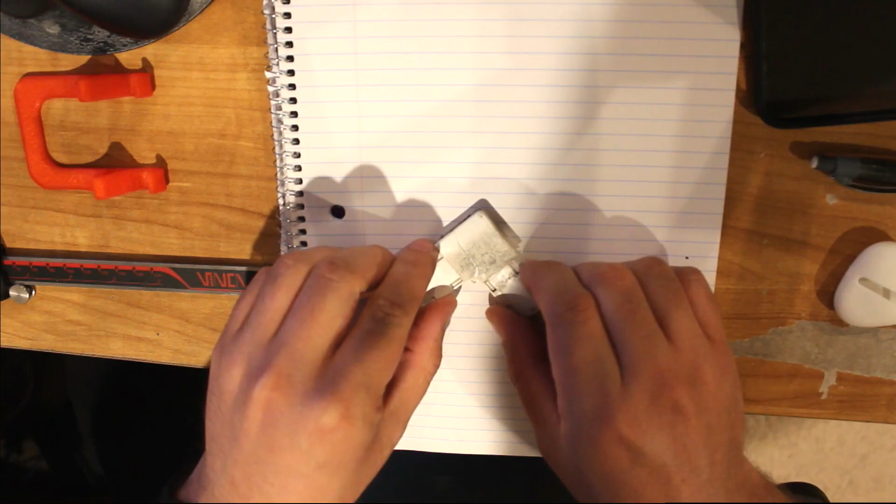Okay, so to start with this, the first thing we're going to do is take our pieces and start on good old-fashioned paper. When we put it together and think about how we're going to make this, we have to look first at what tools we have to work with. When you design in CAD, you have extrudes, chamfers, and other extrude cuts, and this is actually a pretty simple model from the looks of it.

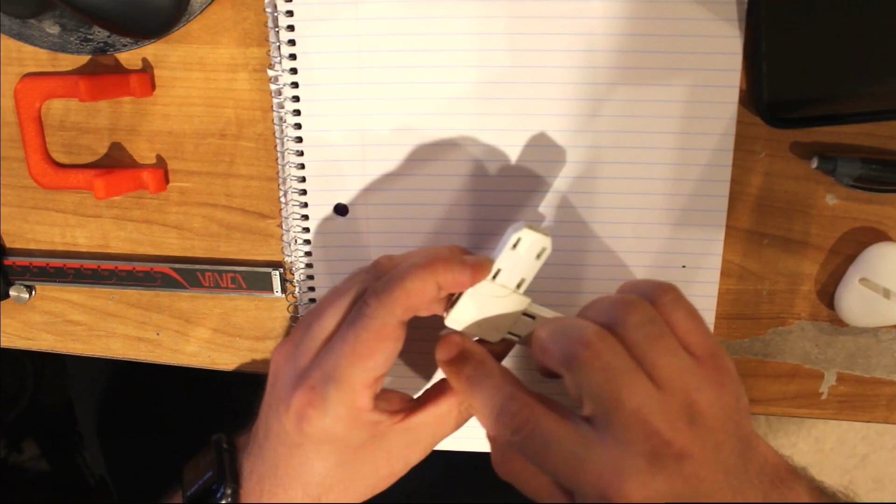So the first thing we're going to do is measure this square here. I'll think of this as a top view. You look at the top view, you have that square, and we're going to take the piece that has the most purchase on it. We're going to measure this at 28.5 millimeters, so this is going to be a 28.5 millimeter square.

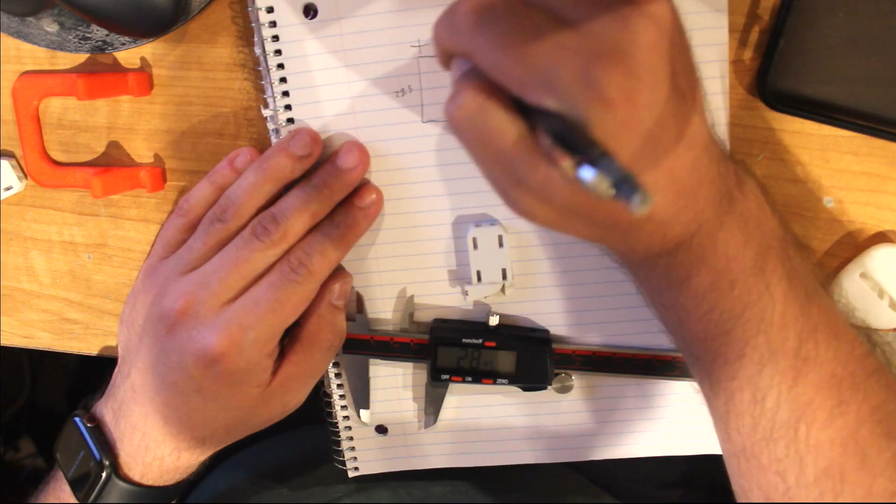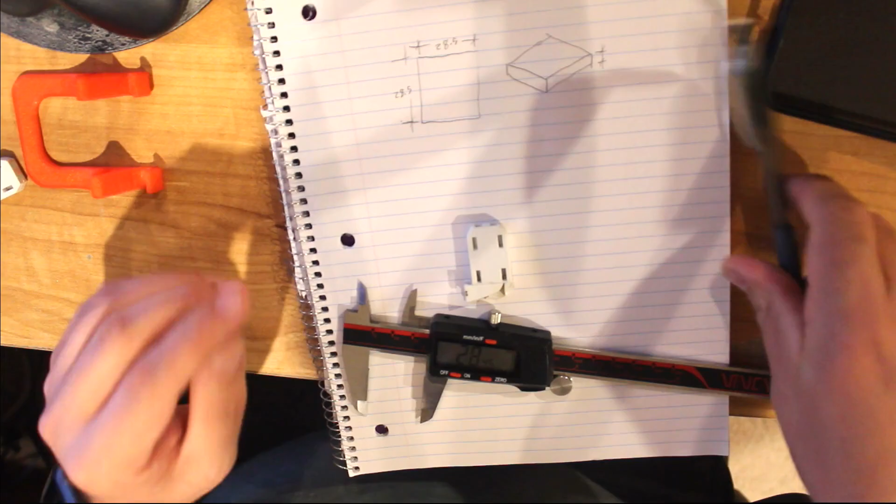And then for depth, we're going to look at how deep we want our square to be. We'll go ahead and quickly draw this ISO view to give us our depth, just adding these features real quick so we know where we're at. So for our depth, we'll take it and measure across the top at about 7.8 millimeters.

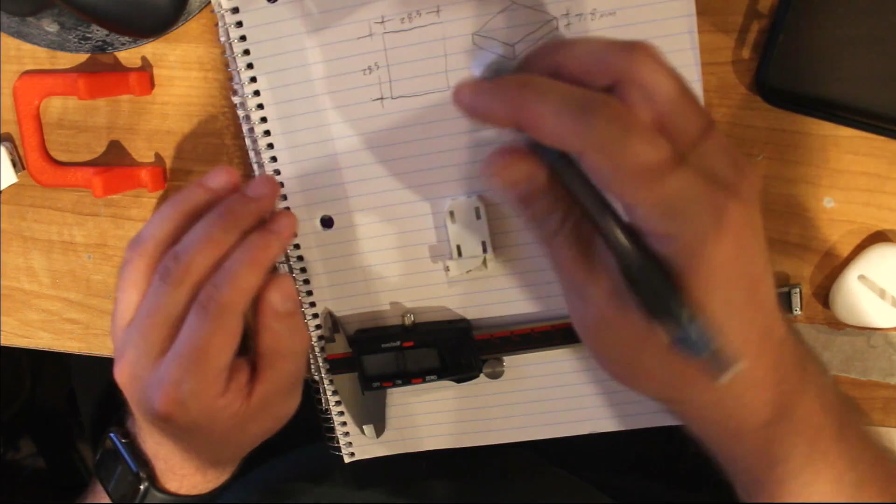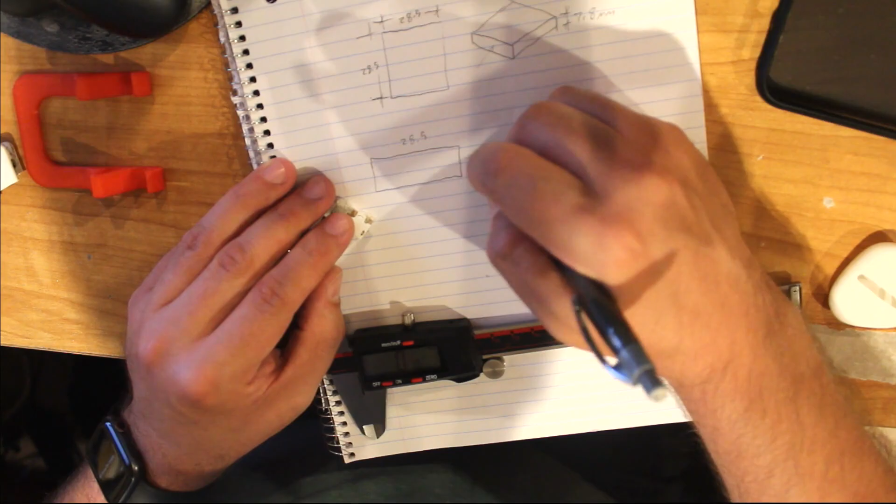Okay, and now for the tangs, these little tang parts, we're going to have to draw that on this face right here. So I'm going to draw a square that is that face. We know the top is 28.5, the side is 7.8, and now we have the little tang in there, like so.

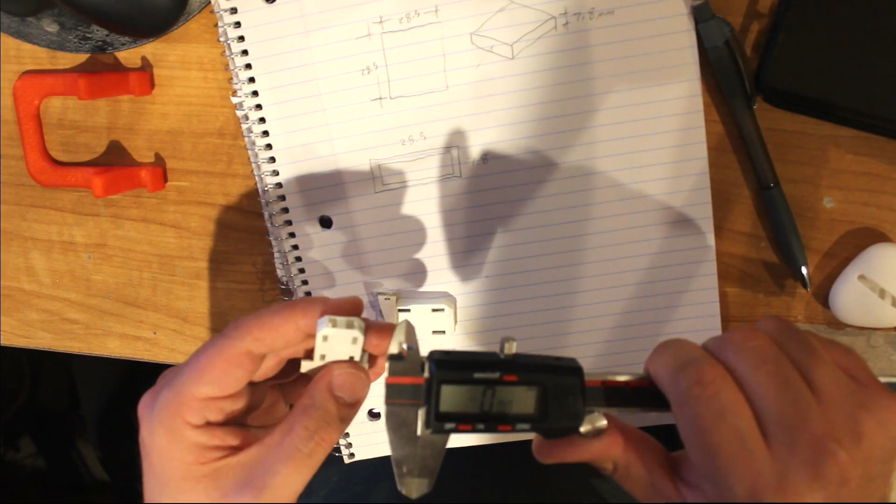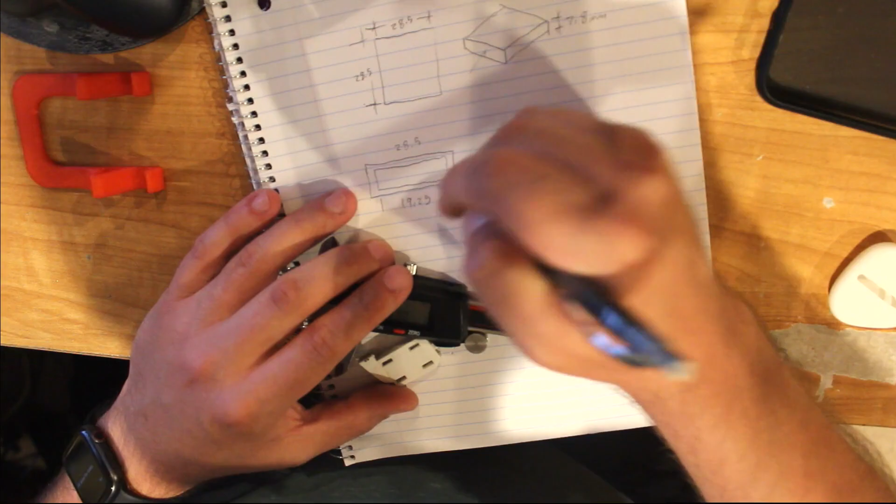So we'll measure its width: 19.3, measure the other one just in case, 19.24, 19.17, 19.25. So we'll do 19.25, I think. Its dimension right here is 19.25, and its depth, similar to how we did the body itself, measures 6.84, 6.8, 6.89, 6.86. We'll do 6.8.

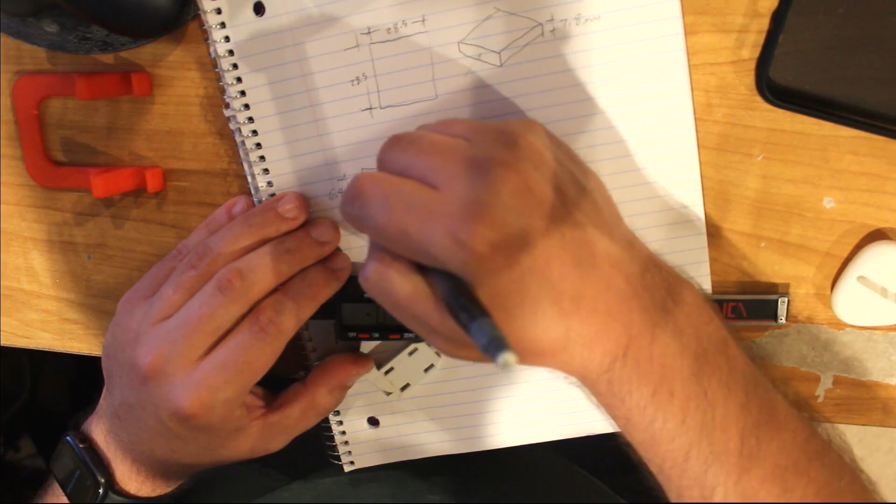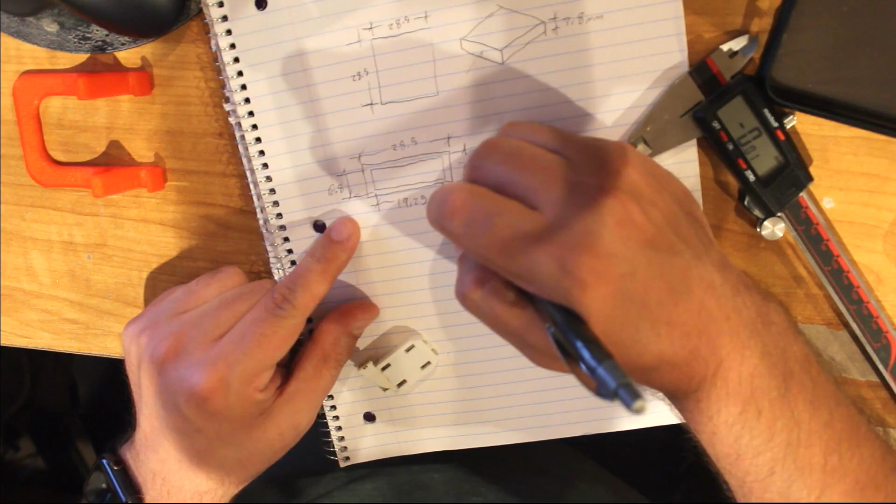Okay, so we have 6.8 there. I'll draw those out so we remember it - 19.25 there, and then this dimension to the end right here, we'll need that as well.

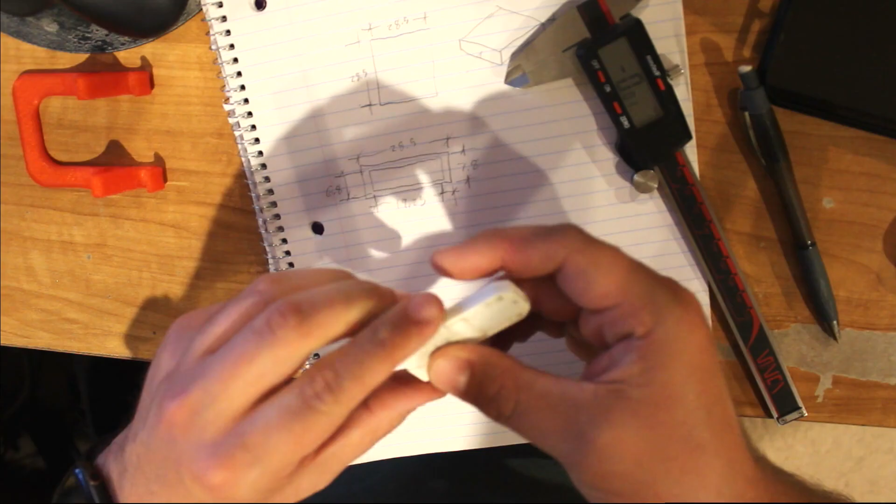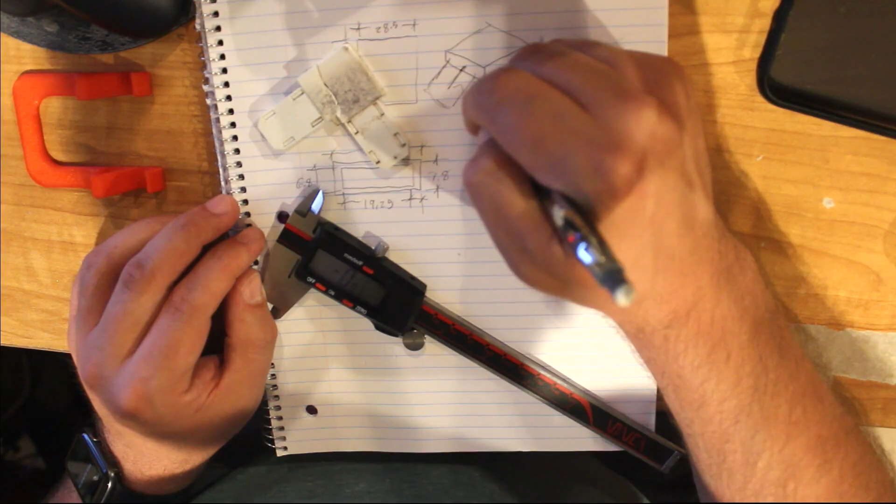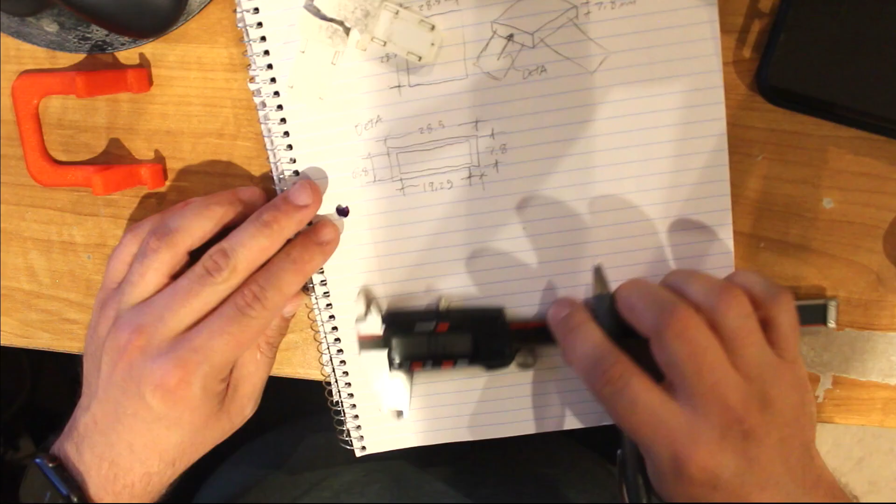So when we think about how this is drawn, these actually aren't symmetric - they're not on the center line, they're actually offset slightly. So when we look at it like this, maybe we'll sketch these in just so we understand our point of reference. This here, we'll call this detail A. So this is, looking at that like that, detail A. We'll know there's a little cutout right here as well that we'll need to contend with.

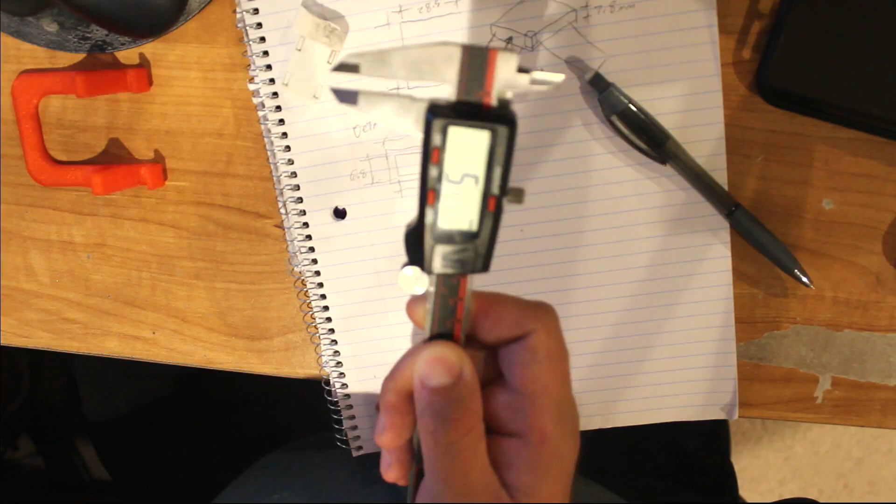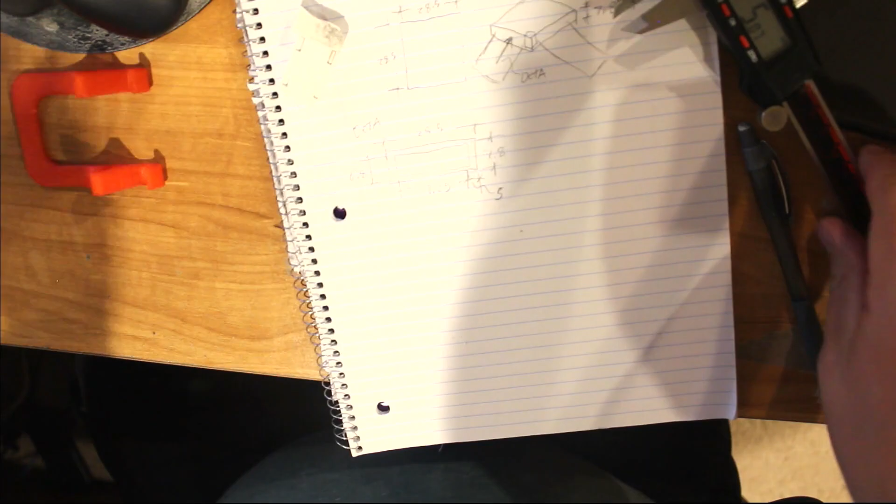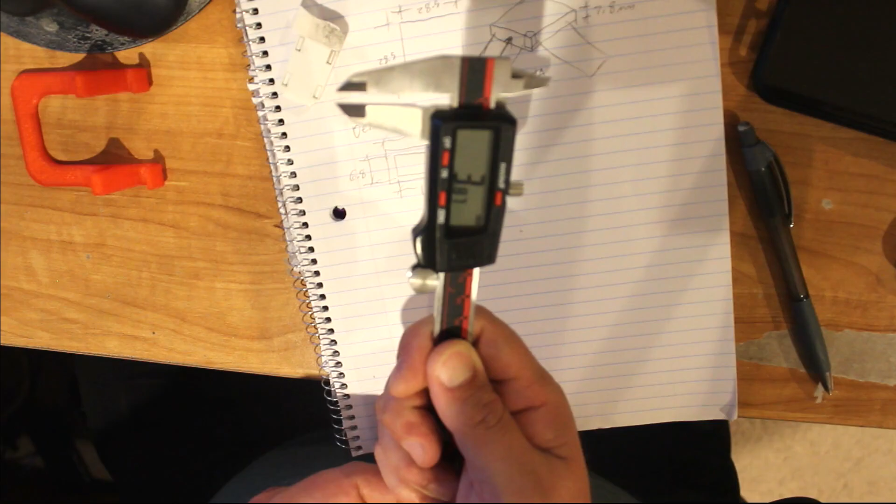So let's take a look at that cutout. How far from the edge are we? We measure it like that - about 5 millimeters, I'm going to call it. So this dimension right here is 5. And the dimension from the other side is about 3.9. So this dimension here is about 3.9 - let's just go with 4.

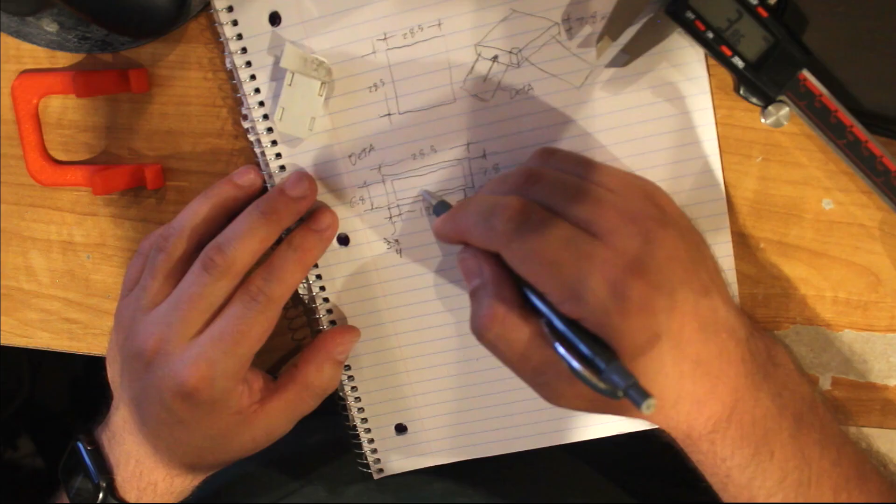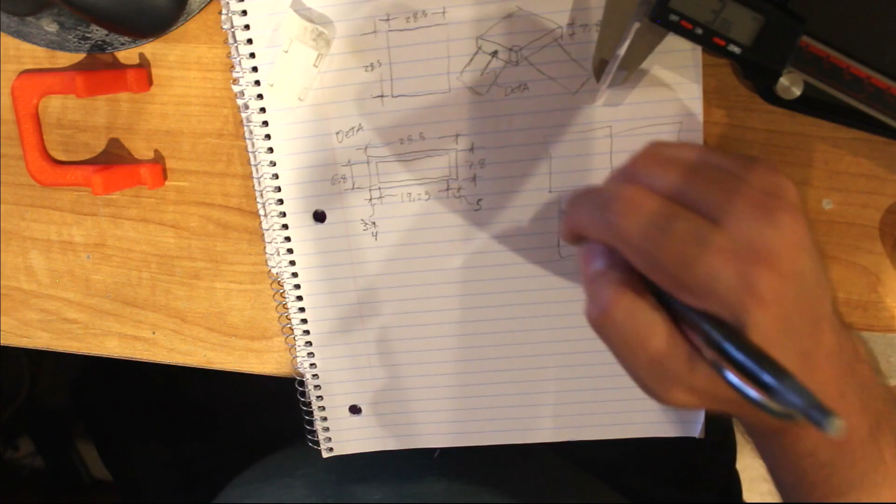Okay, so that's that. Now let's look at the length of this tang. We'll draw it from the top again, and we have this tang here like this, and this tang here like this. So this distance from here to here is going to be about 29, I'd call it. There's a couple different ways you can measure things, so you can do it like that - about 28. So we're going to call that 28 millimeters. And then what else do we need to measure? These chamfers.

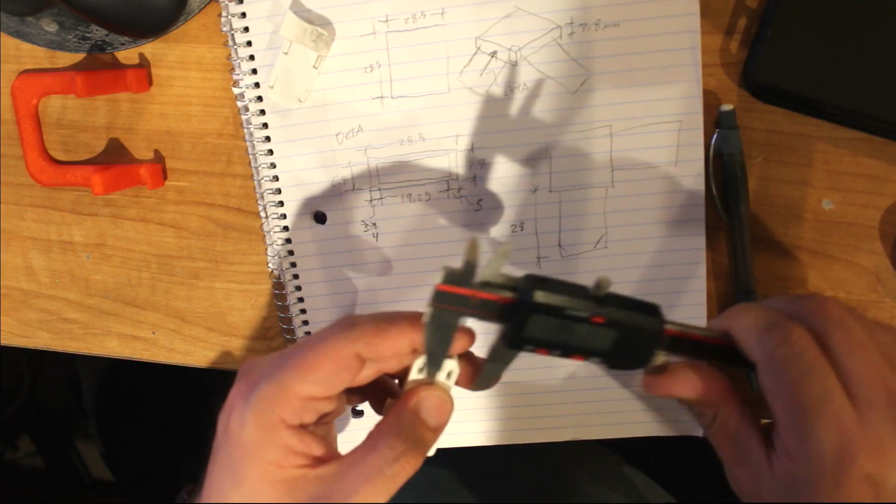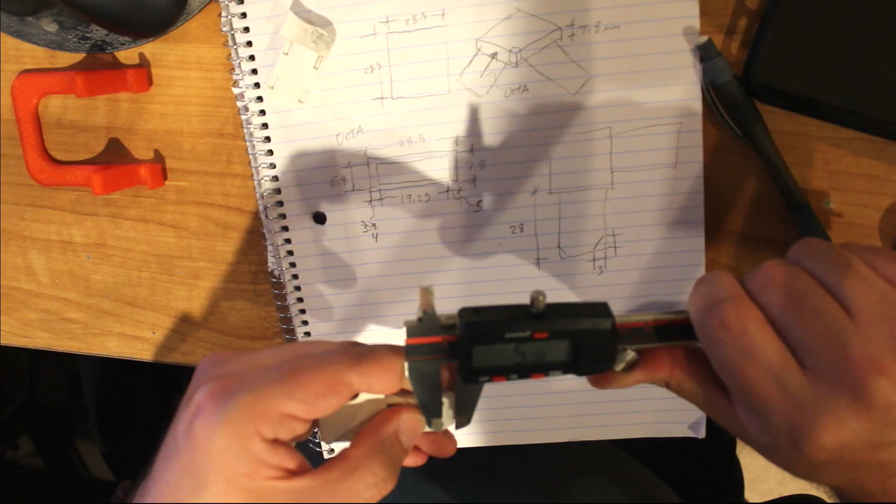So these chamfers actually aren't 45 degrees, so we'll do a two-dimensional chamfer. Measure that at roughly 3. And then right here we'll do at roughly 5. So this is roughly 5. Okay.

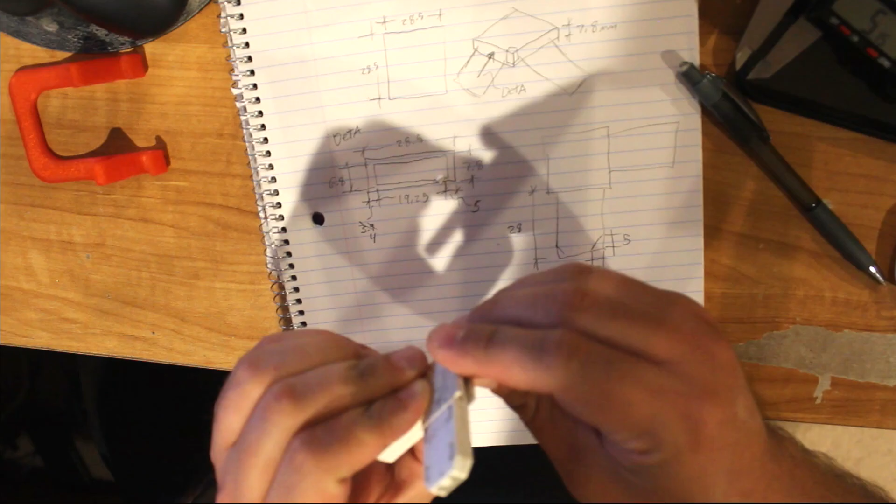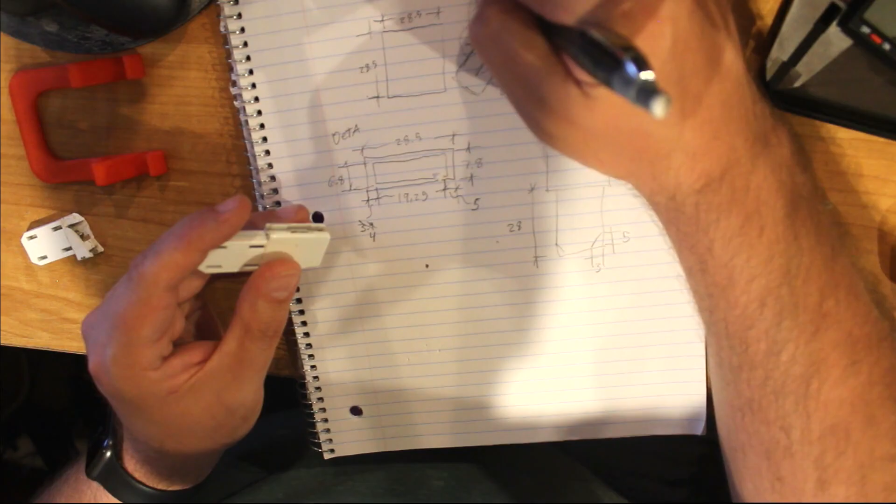Alright, so then the last thing we have is, if we take a look at this, there's this channel along the back. Now I'm not going to model every single little facet inside of there - I don't necessarily think it's needed. So the thing I'm going to look at doing is, so we have this one here, so this will be detail B, and then we have this little notch channel, so that'll be detail C. So detail B, let's address that now.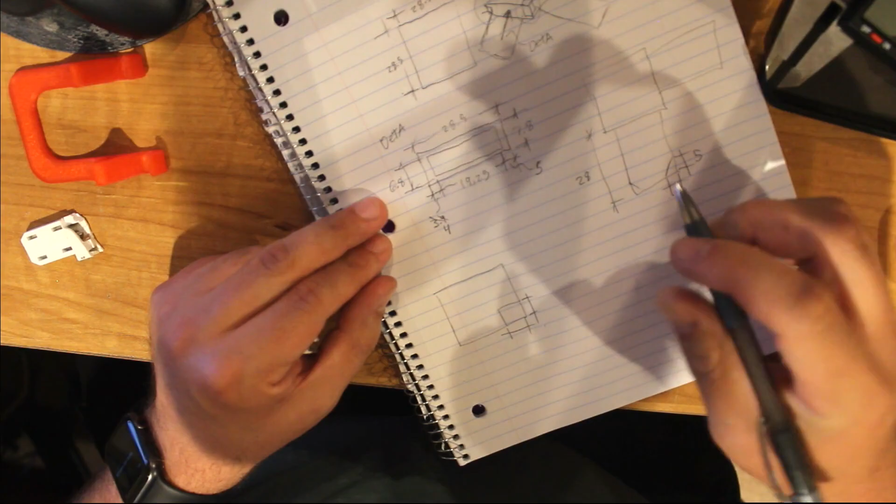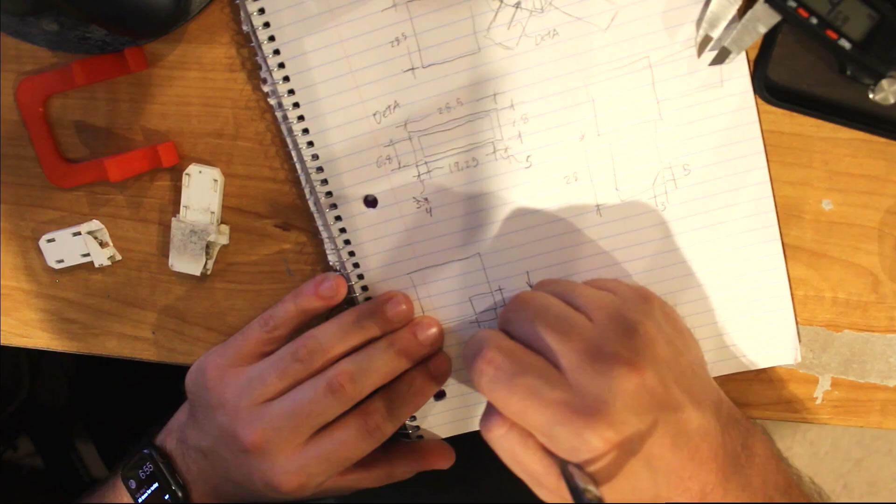So here's our top view again, and we have the notch. We'll draw it like this. We need those dimensions, and then we also need the depth of cut, because when we do this in CAD, we're not going to tell it this distance, we're going to tell it how far down to cut. So we'll denote that as this. First let's grab our dimensions here using the plunge side of our caliper, 4.7. We'll confirm the other side - it looks like a square, but we want to make sure - and that's 4.7. So 4.7, 4.7, and the depth is then 6 millimeters. We'll call that 6 millimeters.

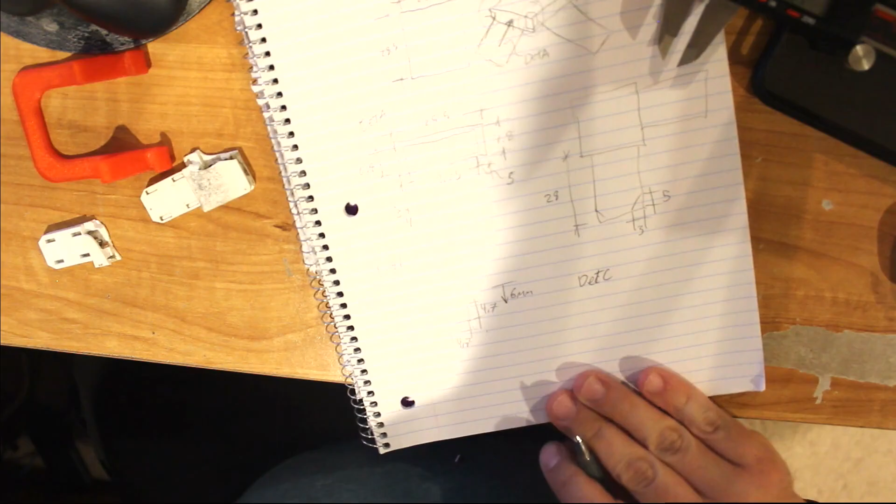Alright, and I think the last one we have is detail C, so this is detail B, and now we need detail C, and that's that channel. We'll draw it from a side view again, like this, and it's just going to be a simple cutout like that. We need our depth, need our width, and need our distance. So I kind of cheated a little bit and already measured this once - I know that these are 1 millimeter each.

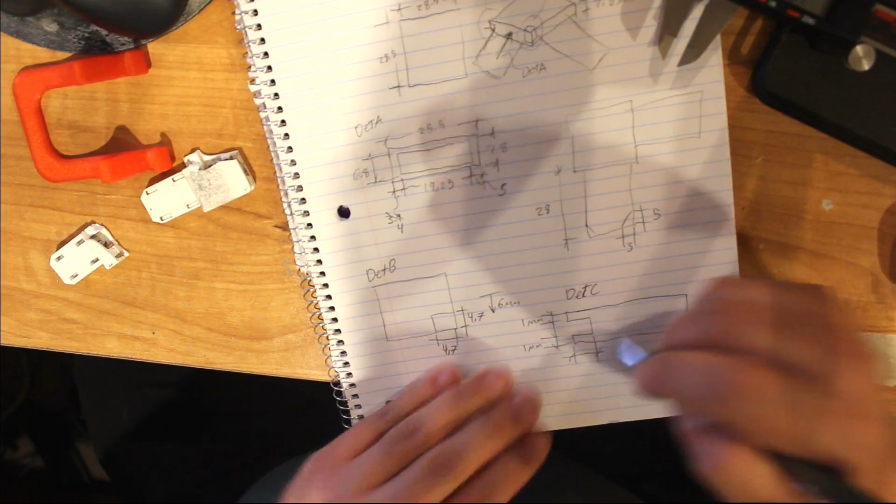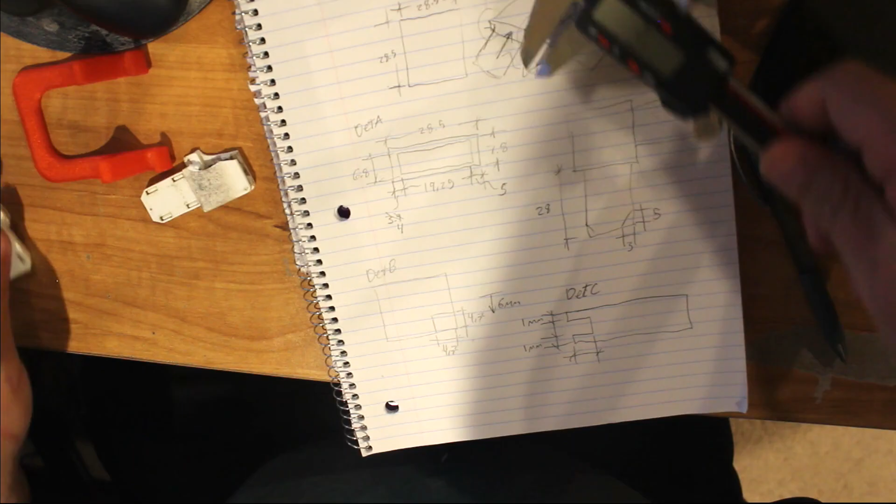And this depth here we'll measure again real quick just to make sure. So for that we'll use our plunge again, bring it down. It's about 3.8. And then we need to measure how far apart it is open in here. About 5.25. Make that spot.

Let's pick another spot. That one's too broken. Let's try this one. 5.75. So we'll do 5.75.

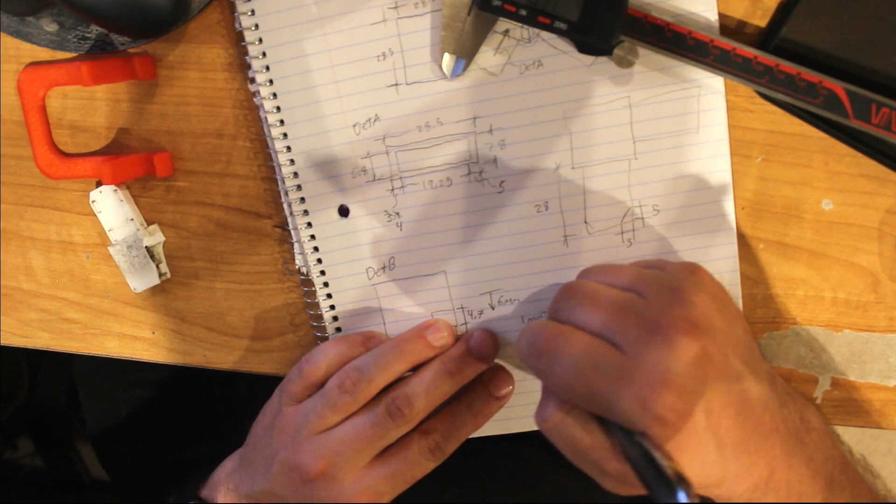Alright, and we'll make all this work out when we go into the 3D model too. We don't have to be perfect, but those are the key dimensions that we need. Now let's go over to CAD.

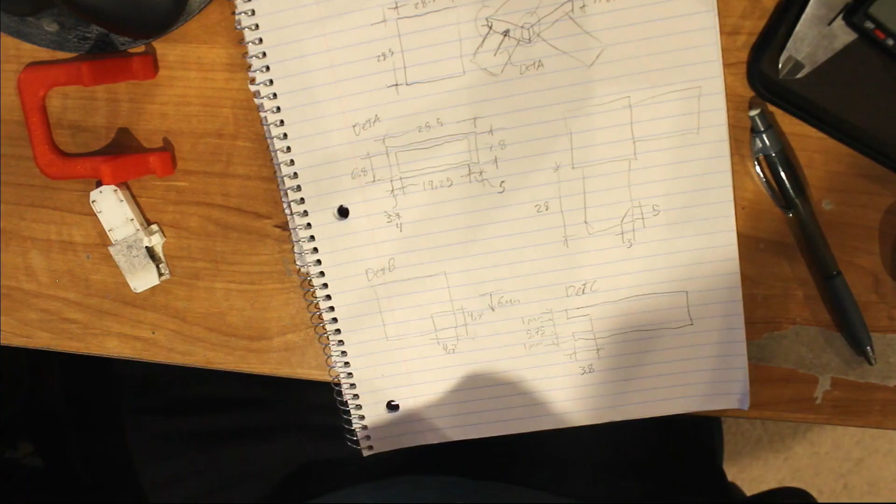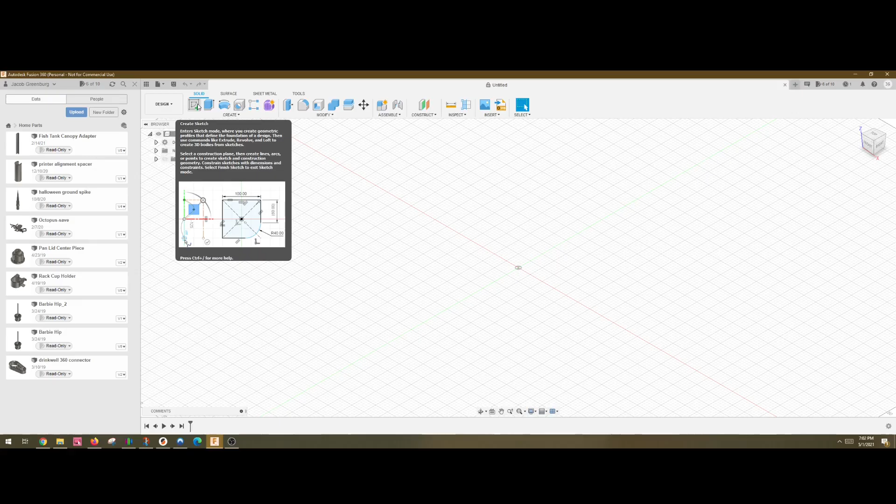Okay, when we first open Fusion 360, it gives us a new window. So if I just close that, there it is. This is what I have mine set up to look like. And we're going to refer everything back to the drawing that we made. And we still have the parts in the caliper, so we can measure it out if we need additional details. But like I said, we're going to start from the base.

So we'll quickly create a rectangle here for the base, and we measured that as 28.5 by 28.5. So there's that. We're going to extrude that the thickness that we measured at 7.8 millimeters.

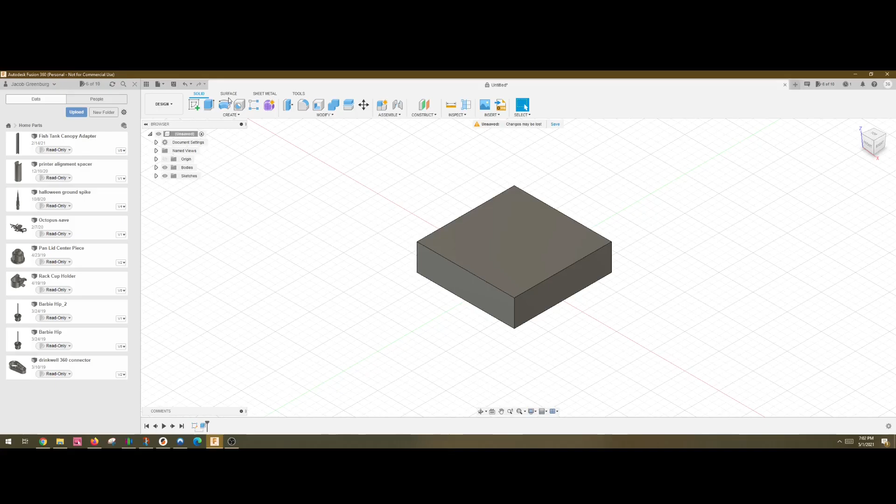And now we're going to add the tangs. So the first tang is over here. We're going to draw in a rectangle again, and we hit D to dimension. So we need this distance, and that was going to be 5 millimeters, and this kind of scooted out, so we'll drag that over.

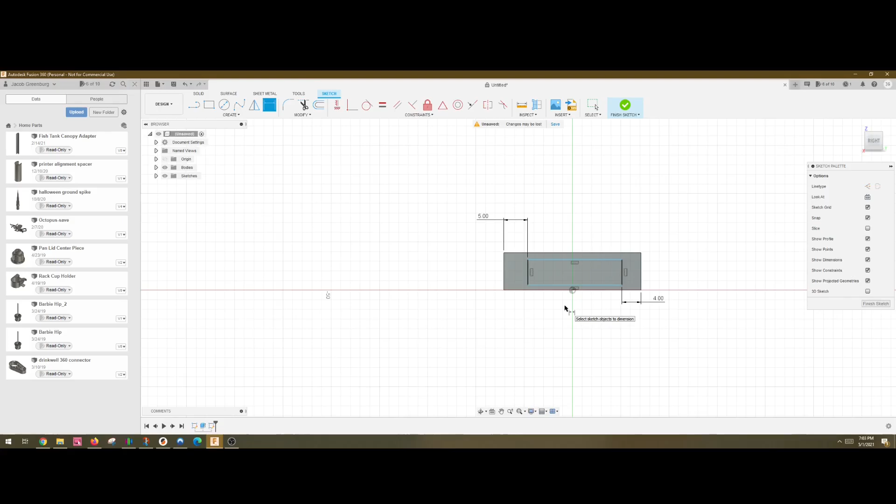Don't need the thickness yet, but let's hit D again. Okay, so this one is going to be 4 millimeters. And then what we'll do is the height. So we have here to here. That's going to be 6.8.

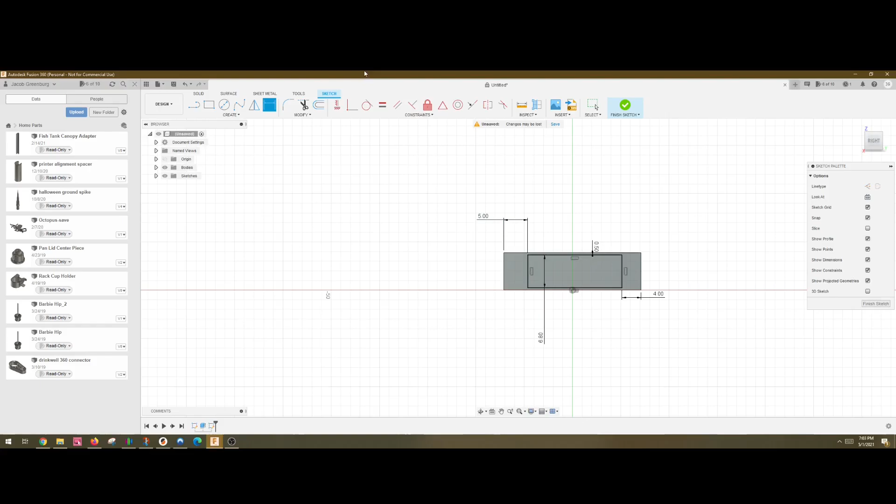And then looks like we didn't measure this in our drawing. So I'm going to grab my calipers real quick and grab that distance, which is about 0.5. So we'll go from here to here to be about 0.5. And there we go. So now we go back, we extrude this out to a total of 28 millimeters, and that's done.

And then we'll do the same thing to this other part here. And normally I would just pattern these, but for whatever reason they don't pattern very well over the axis, and I think that's just because these dimensions here aren't symmetric. So that's 5. Bring this back inside.

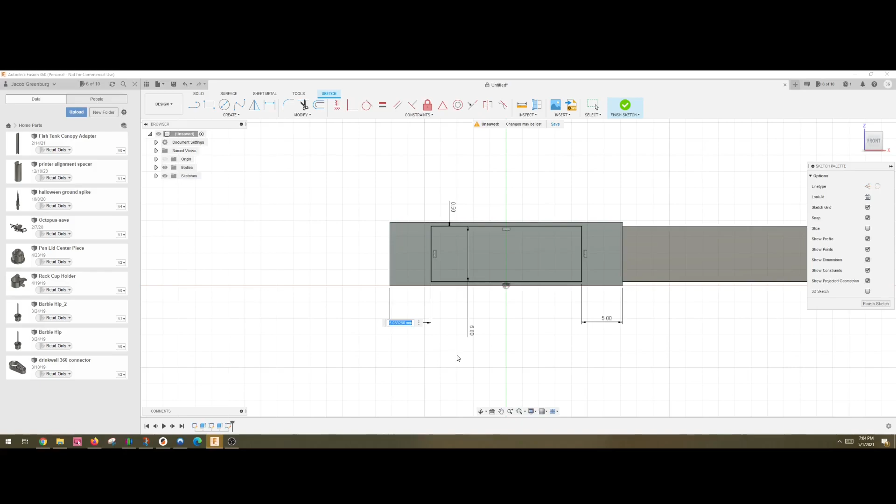Dimension the thickness, I suppose, which was 6.8. Dimension top to bottom. I have to measure it again because I forgot. 0.5. There we go. And then dimension from here to here. That's going to be 4.

All right, so now I need to go. We'll extrude it again, also 28 millimeters. There's our initial part. Let's do some quick checks for symmetry. 0.5, 0.5. Okay, that's good.

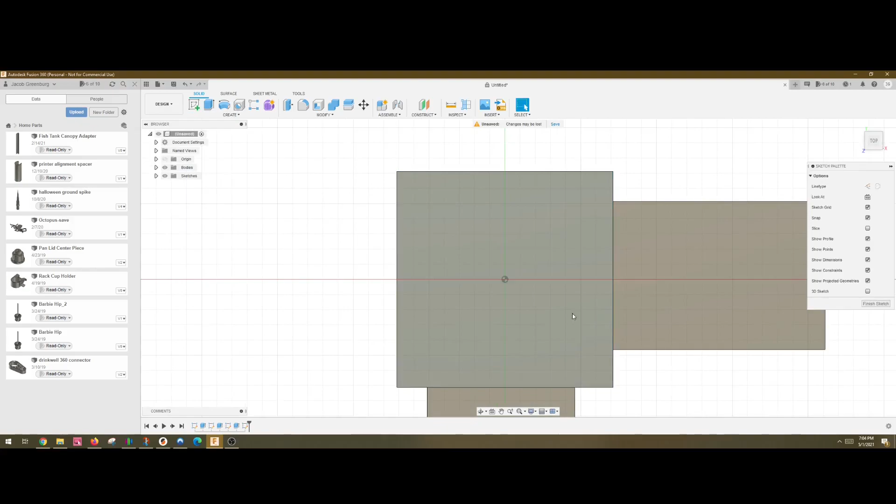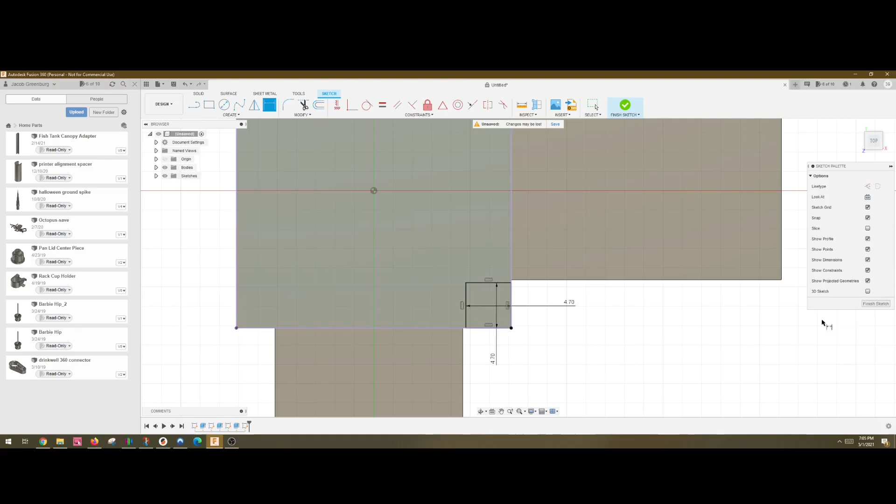Next, we'll cut out this little square right here. So to do that, we need a new sketch on that plane. For this one, we're going to project this top surface, so it'll give us the box lines. And we'll draw from here to here. We'll dimension each one at what it is, so 4.7. And this side here, 4.7.

Finish sketch. Extrude, so we're cutting. So we're going to go negative 6, I believe. Yeah, there we go. Seems a little bit too shallow. So let's remeasure: 6.2. All right, so let's go back on our feature tree here, edit feature, we'll make that minus 6.2.

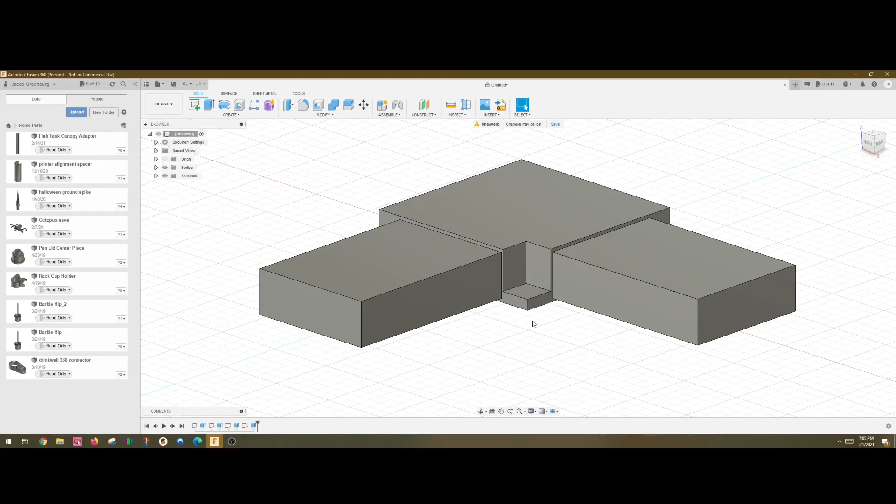Whatever, that looks fine. All right, so the next thing we need to do is to cut that channel work back here. So let's do another sketch on this surface.

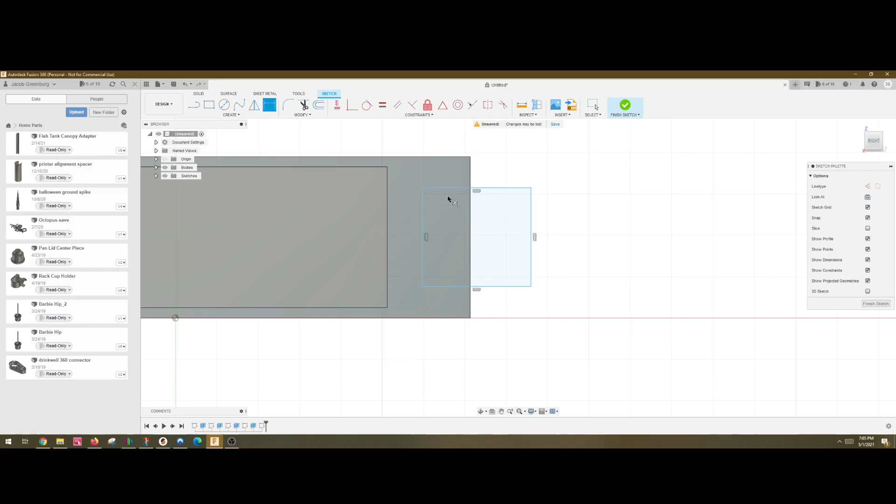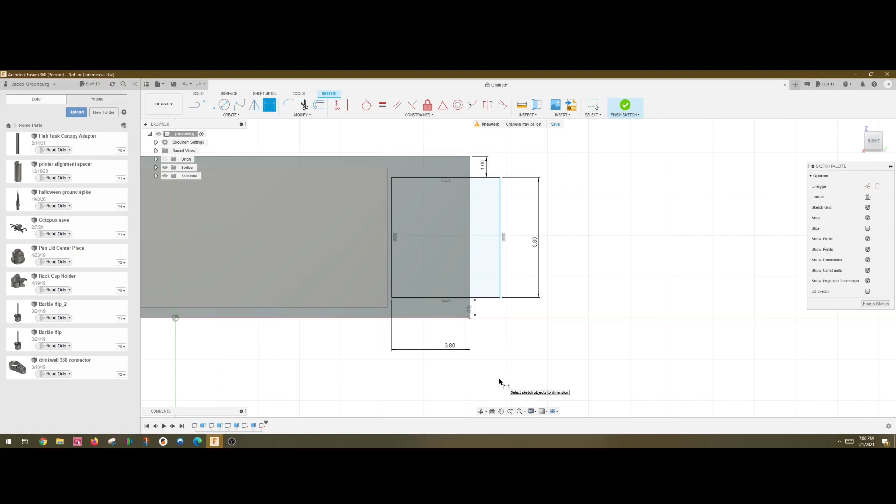And we're gonna draw another rectangle like this, and we're gonna start dimensioning it out. So we have top to bottom being 5.75, and we have this to here being 1, and we're going to do this. It'll over constrain it, which is fine. We just want to balance it, so 1.05, 1.07, so we're going to do 5.8. There we go. And 3.8 deep, so we'll dimension again from here to here, 3.8. I believe that looks pretty good.

Okay, so now we need to extrude cut this throughout the part. We'll just go through all, kind of lazy, so there we go. And now we need to do it again by going the other direction.

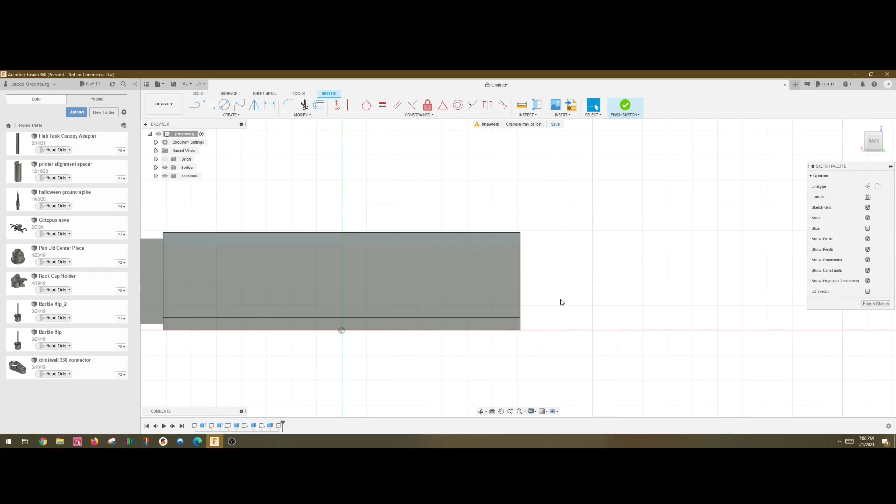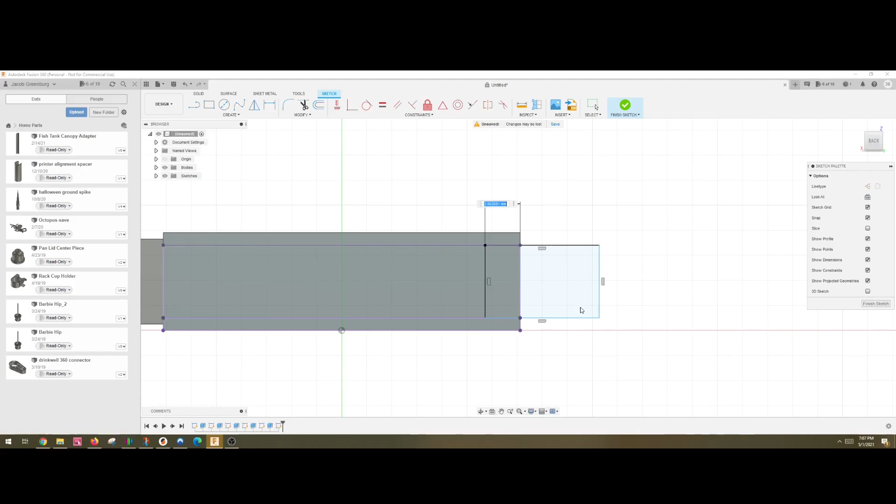So we'll draw it like this. What's neat is now we can, since we already have this first cut done, we can actually project these faces like so, and it'll create these reference lines that make it a lot easier to draw. So we'll grab this, we'll grab that, we'll pull it over, dimension here to here, and we'll do 3.8 deep, solid, extrude, cut, ISO through all, and done with that.

Oh, I did forget, there's actually a radius on this corner. It's not a sharp corner, so let's roll back the feature tree a little bit and slap a little radius on there.

3 millimeters, just a guess. It looks fine, why not? And then we'll go ahead and bring those grooves back.

Next, these are chamfered on the ends, these little tines here. So let's go ahead, we're gonna hit a chamfer. Hit those corners like this. First dimension is going that way, so this way.

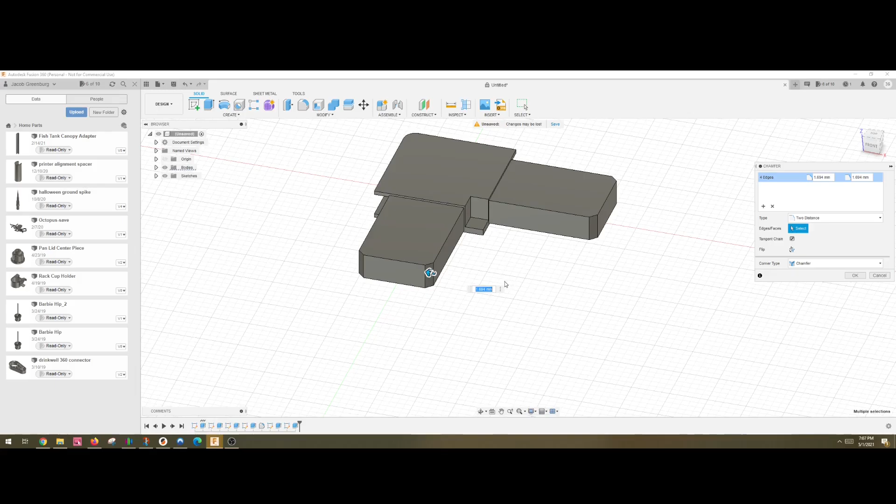So we'll go ahead and describe that as 3 millimeters. And the second dimension is 5 millimeters. And there we go, just like that. So that looks pretty good.

I don't like that, there's a lip here for 3D printing because we're going to be printing it in basically this orientation. So, but we'll see how it goes.

So I'm going to save this. It's a screen door corner. Save. All right.

So next what we need to do is actually make this into a 3D part, right? So to do that, we use Prusa Slicer, and I'm going to export this.

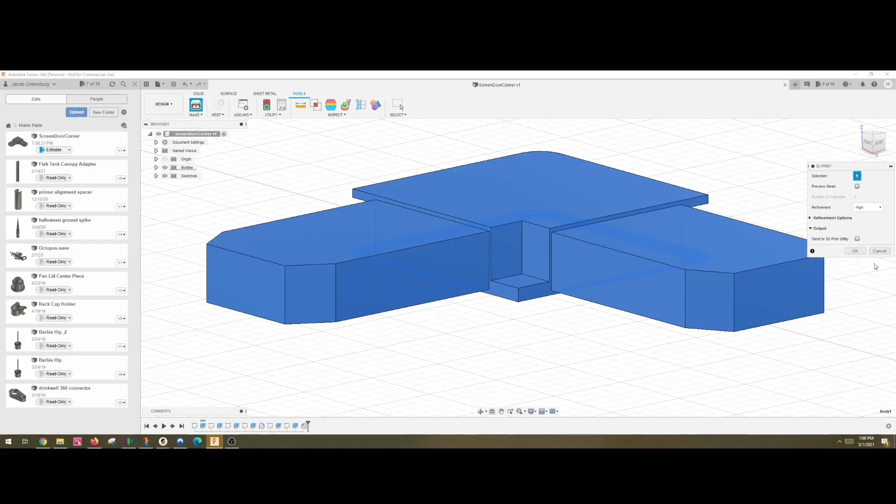So now that it's saved, I'll make it. I don't want to send it to Meshmixer here, but let's preview that mesh and see what a mesh looks like. See, pretty simple, pretty straightforward, not bad at all.

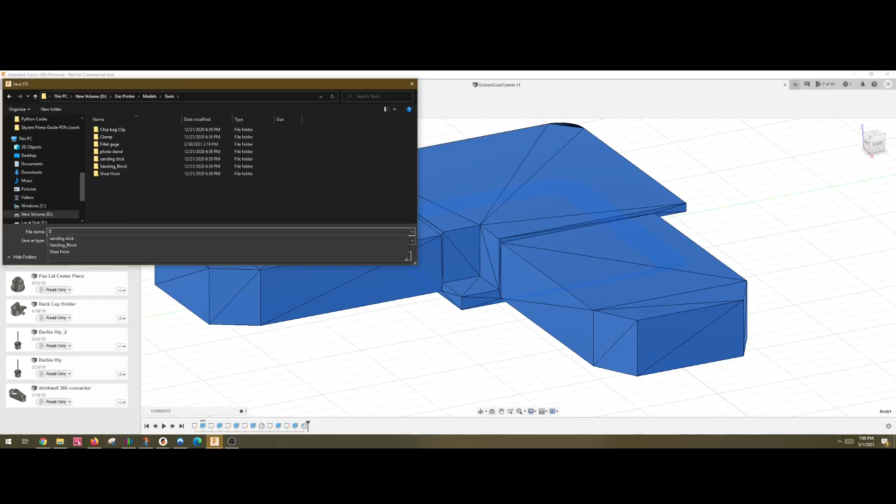So let's go ahead and send that out. I'm gonna just kind of drop this in models. Let me see here, tools, and we're gonna call it screen door corner. Save. All right, next we go into Prusa Slicer.

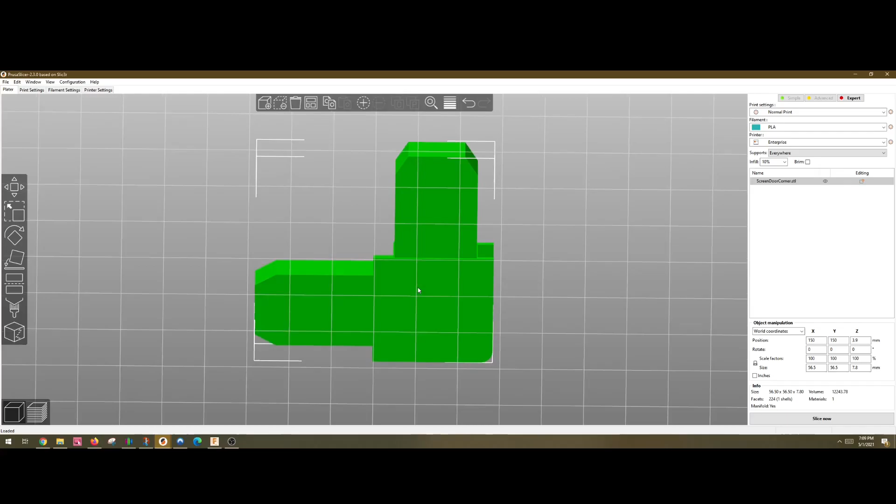We're going to add the file we just created. So models, tools, screen door corner. Load it up. Looking pretty good. Looking nice. I like it.

And for this, we're going to just do normal print, PLA, and we're going to use my big blue printer. And supports everywhere, infill.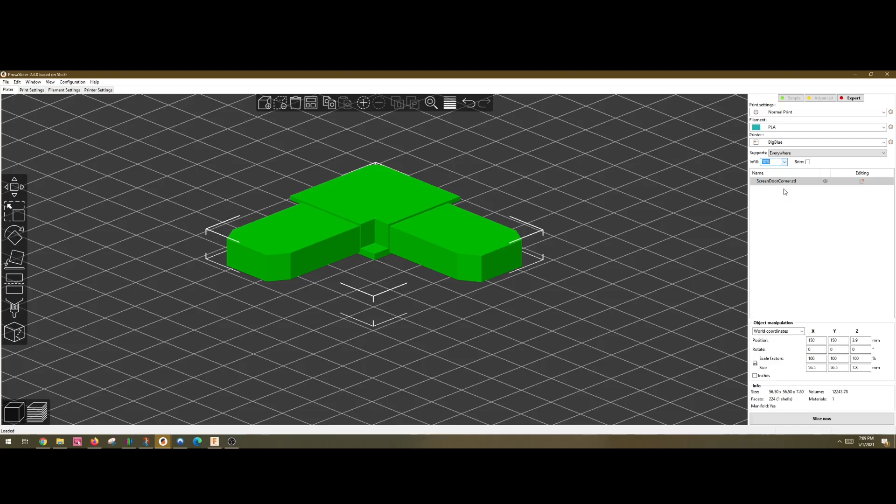So for this, I don't think infill's all that important. What I think is more important is the number of perimeters. So we're going to bump that up to 5 to make it extra strong. So let's go ahead and slice it.

Take a look at what we did. Yeah, see, it's not gonna want us to print that because this is here.

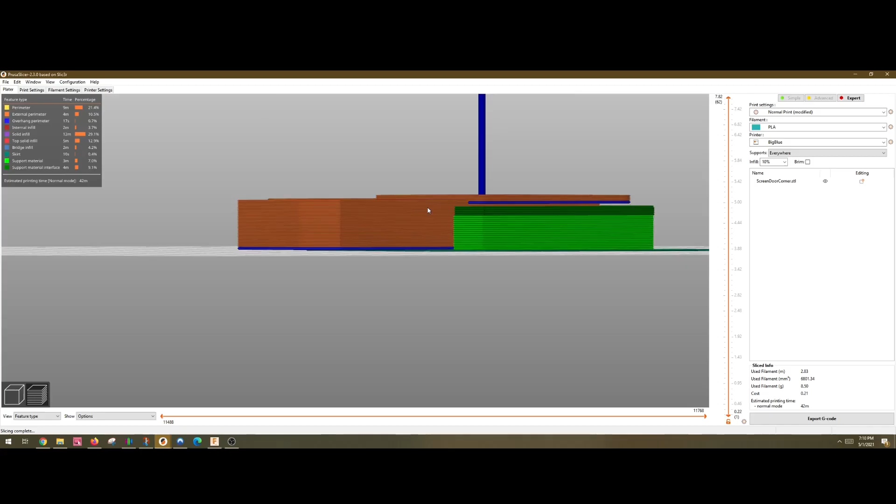So what we can do is actually drop the model by 0.5. I think that's what we had, so let's do 0.5 down. And then we'll slice it again.

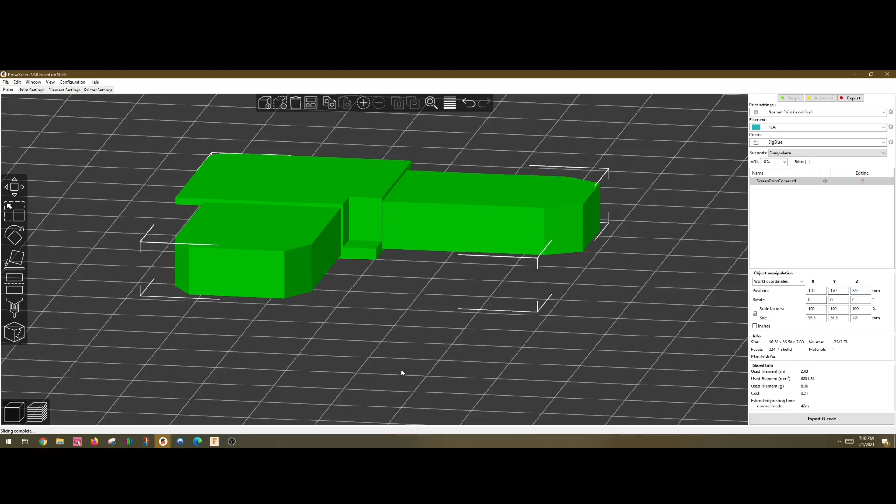Actually, let's just go into Fusion and do that. So because we don't want to print support material underneath this, I mean, it's only like 0.5 millimeter, so it won't print correctly. We're actually going to cut the bottom face out.

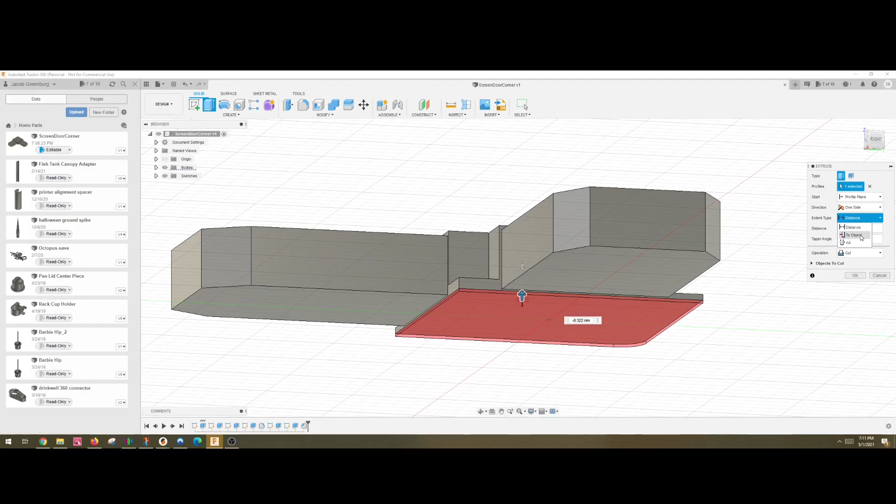It's kind of cheating, but I'm okay with it for now. So we'll extrude this, we'll cut, and we will go not distance, but to object, that object, and just remove that full base like that. Now it's nice and flat, it'll print nice and easy.

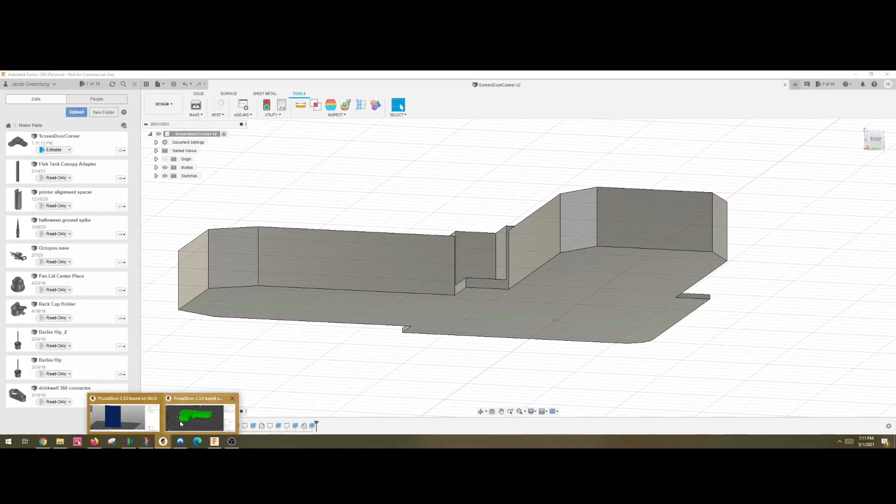So save the file, tools, make, select, okay, screen door corner, save, yes. All right, next thing we do, go back to Prusa Slicer, and we're gonna delete that model and re-add it now that it has no bottom. There we go. And slice.

We can preview the 3D print. This support material might be a little bit tough to move, but we're going to try it out anyways. And let me just show you what the inside looks like. Pretty hollow, but that's okay because I don't think it really needs to be much more than that, especially for the first time we try to print it.

So let's export the G code. Models, tools, save. Exporting finished.

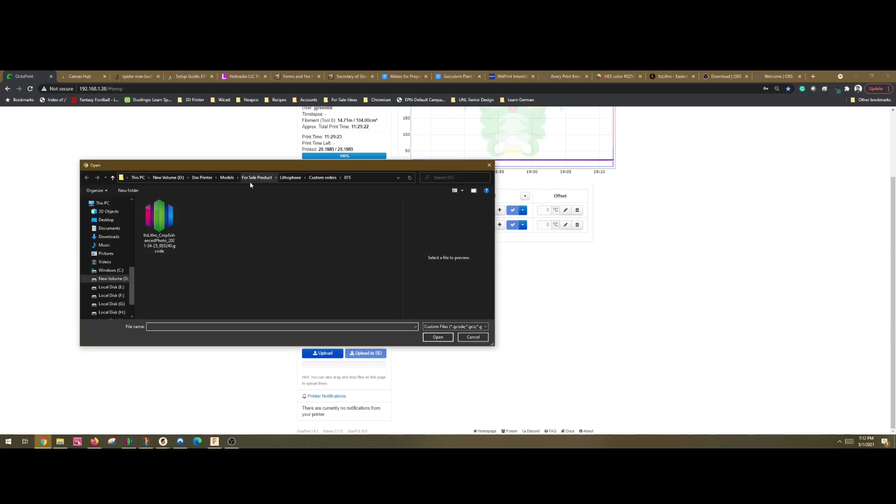Next we go over to our 3D printer. We're going to preheat it. We're going to upload the code that we just cut. Saving. There it is. So we're going to load it in. And now we got to wait for it to heat up.

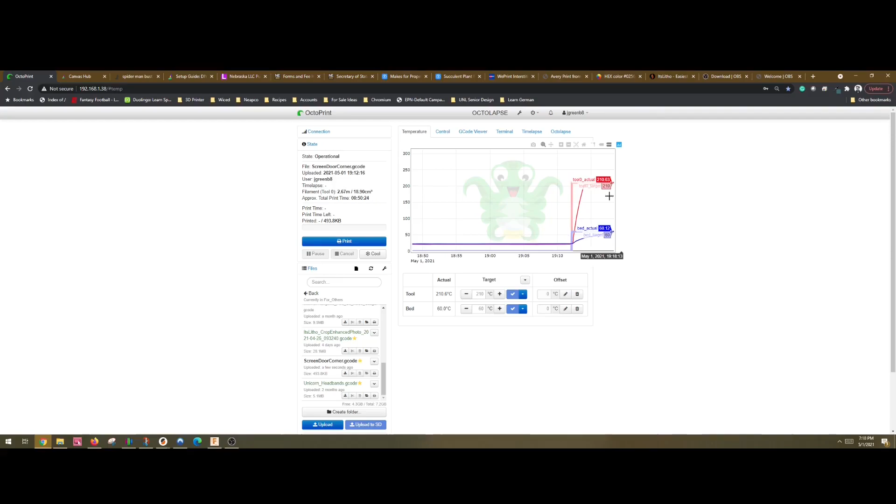All right, the printer's all heated up. As you can see here in my little graph, we're good to go. Actual temperatures, 210, 60 degrees centigrade. We're gonna go ahead and hit print.

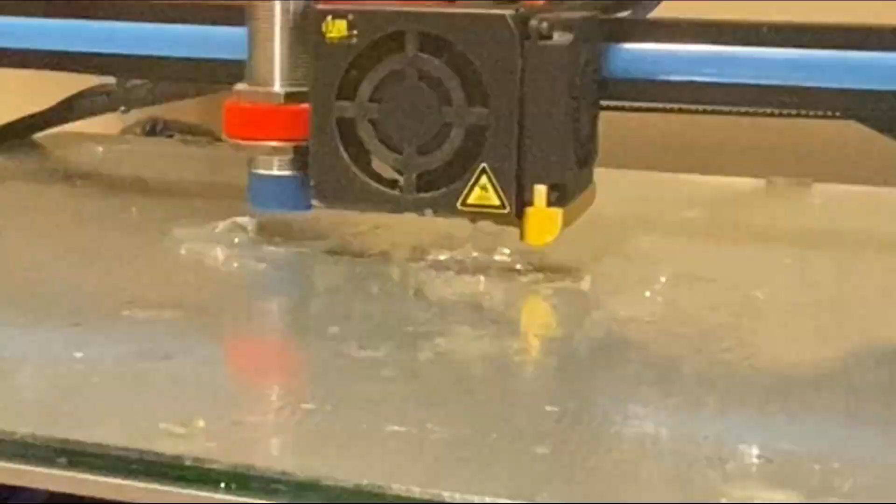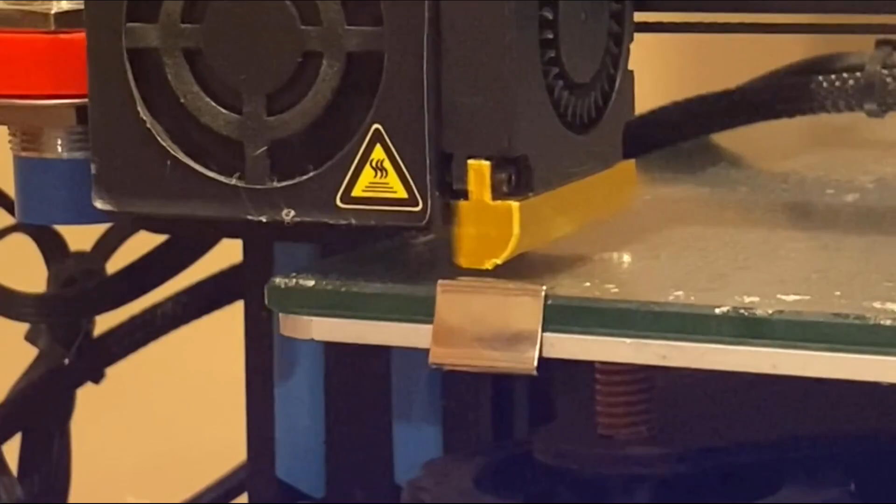Here we go. Go ahead and clear that little bit of filament from there, and starting its homing procedure now. And there's the plastic purge extrude. And away we go.

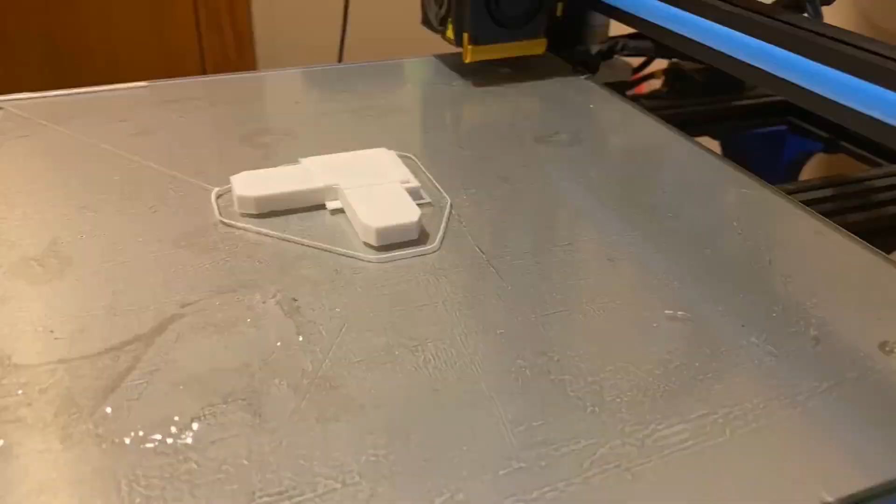All right, so the print just finished. Check it out. Let's get the broken one sitting next to this. There we go. Look at that. Peel it off.

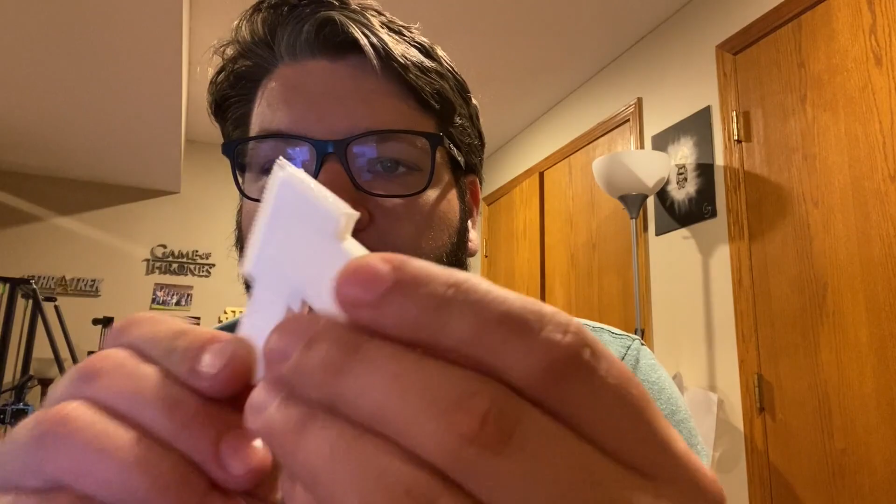Very nice. Very nice. Now I'll have to remove the support material. So the support material printed between that slot, and that can sometimes be a pain to remove. I'm actually a little concerned I might not be able to remove it.

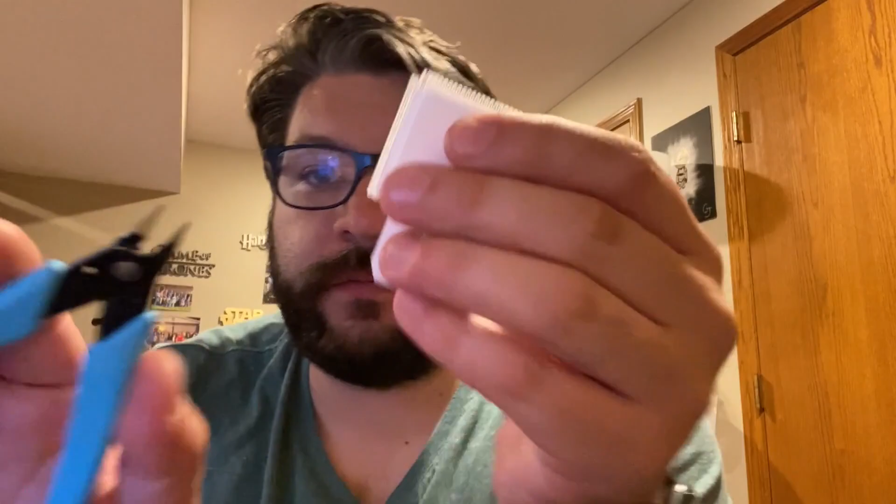Boom. And there you have it. Brand new.

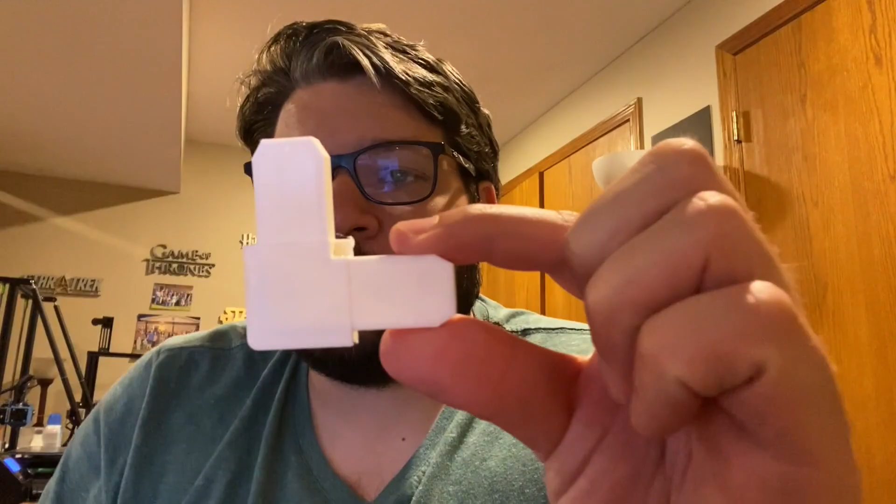Okay, so I hope you enjoyed that video. As you can see, we were successful in making a new part. Took about 45 minutes to print and cost about 20 cents in material. And the modeling only really took us 15, 20 minutes at most. So I'm pretty pleased with that.